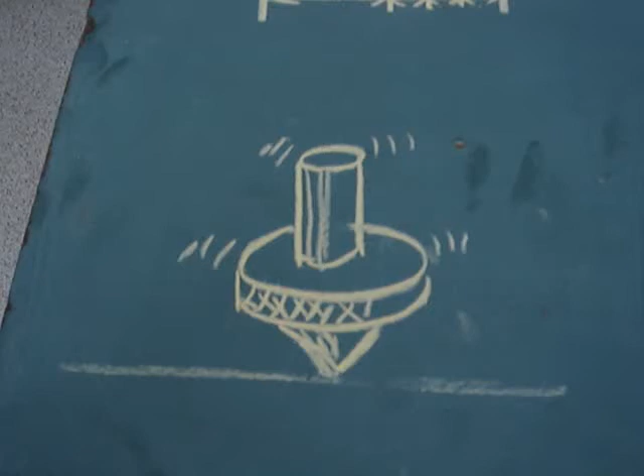Well, here we go again.

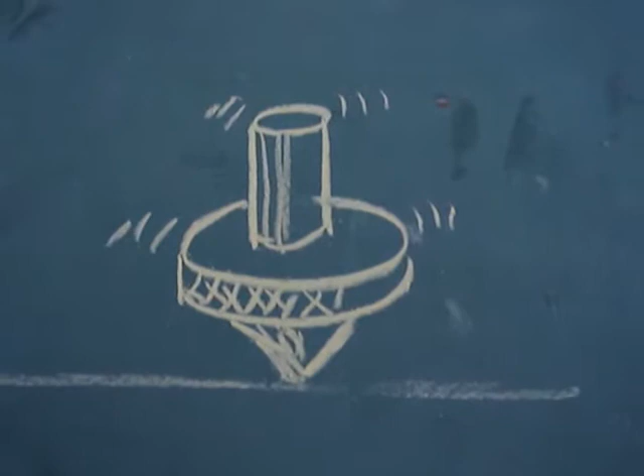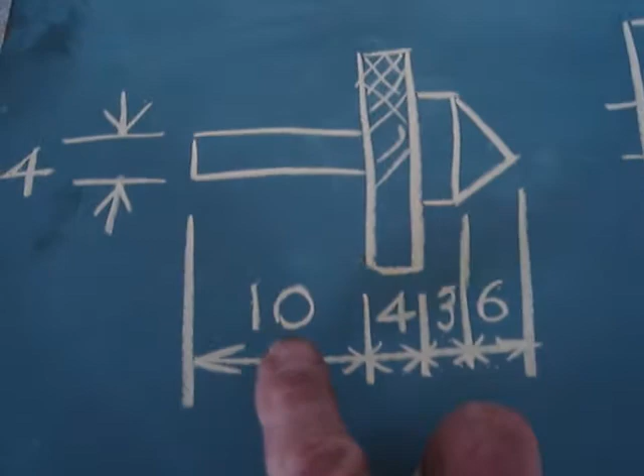Hey, the part we're going to focus on today is this thing here. It's a skills generating exercise, so by the time you finish you should be able to do a whole bunch of lathe skills. So we're just going to make this spinning top. It looks a bit like this. We have a schematic here which has some more specific details, and you see it's got some measurements across here. They are all in millimeters. So this becomes this. We have a number of steps to work through.

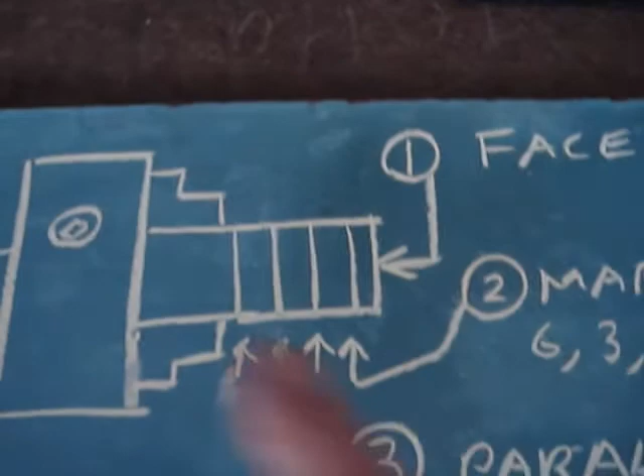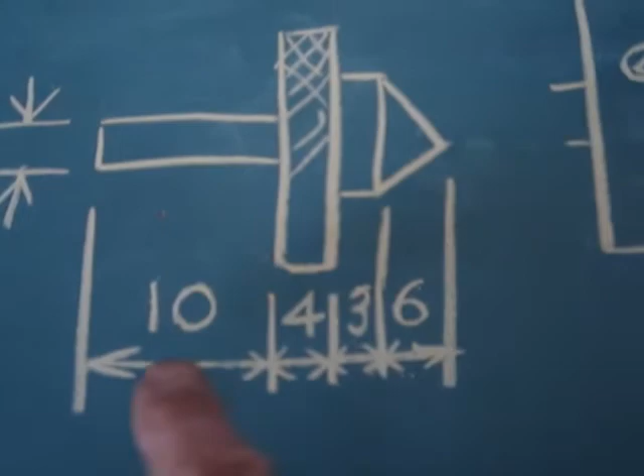The first thing we need to do is put a piece of work in the lathe, grip it in the chuck, looks a bit like that. We need to face the end off, and then we're going to mark it out with those measurements. And now the measurements come from there, 6, 3, 4 and 10. Same over here, 6, 3, 4 and 10, marked across here, and we're going to mark that by putting some ink on, and then we'll move on. So number 1, face, number 2, mark out.

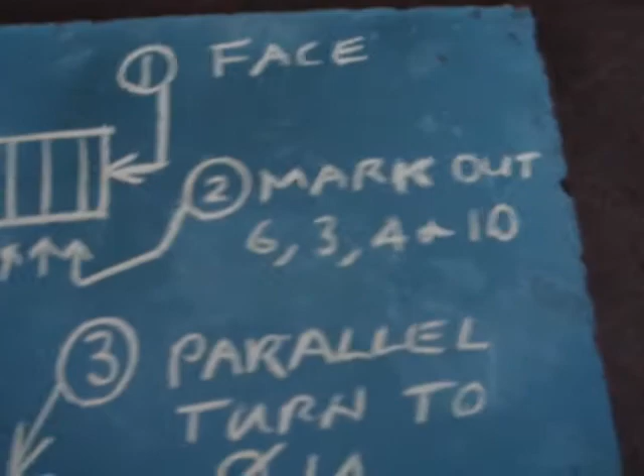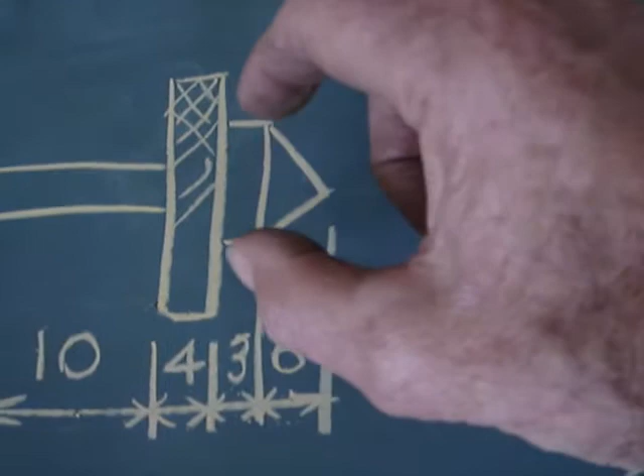Number 3, we're going to parallel turn, and we're going to parallel turn down to diameter 14, and that's actually that diameter there, which actually is not on the plan yet. And what do you know? Now it is there, the 14. So that's step number 3. Step number 4 is to mark out the 6mm line, because we actually got rid of it when we parallel turn. Parallel turn is to create that parallel surface.

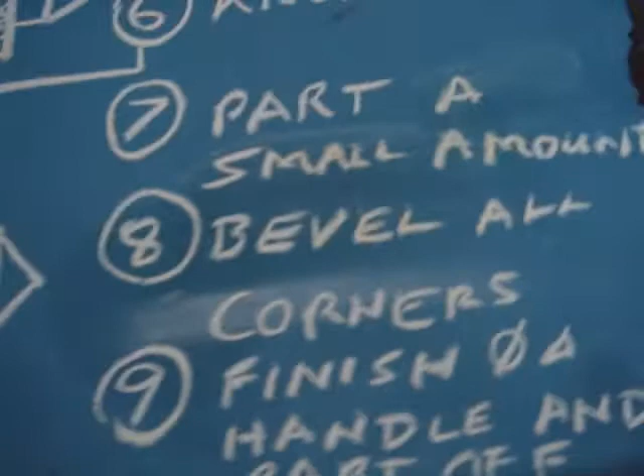Then we're going to taper turn, and we're going to knurl, and then we're going to part a small way through, and then we're going to bevel all the corners, which means taking all the sharp corners off. And then we're going to finish the handle part down to diameter 4, and then we're going to part it off, and then we have a finished product.

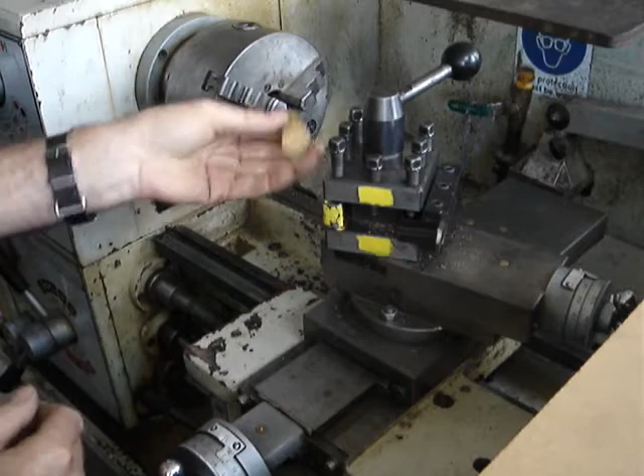Right, we're going to take our piece of brass, and as you can see, the piece of brass has got a sawn surface on here. It's been cut off. You may start with a piece which is longer than this, but we would not cut them to the length that we want straight away, because we're going to use a lathe to do that for us. So we're going to put it in the lathe. We want it protruding about 25, 26 millimeters. That should be enough, so we can do all of the work on that.

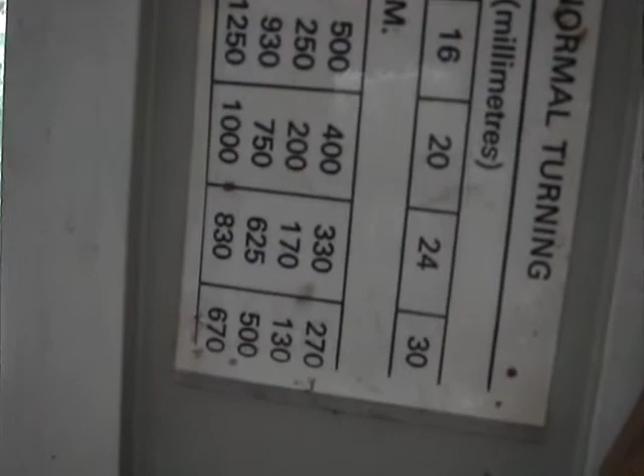First step is to put the lathe on the correct speed. We are working with diameter 25 brass, so it's 25 across from there to there. We have a chart on the wall over there. Or can we see it? Yes, we can. So at the top we've got a number of materials: mild steel, tool steel, brass. We're looking at the brass. So follow down here, it's diameter 25, so we're looking at that 24 line. That's close. This is 625 RPM, and so that's what we would do here.

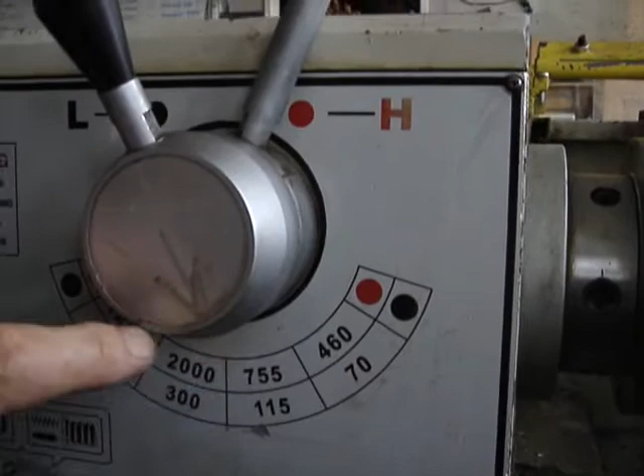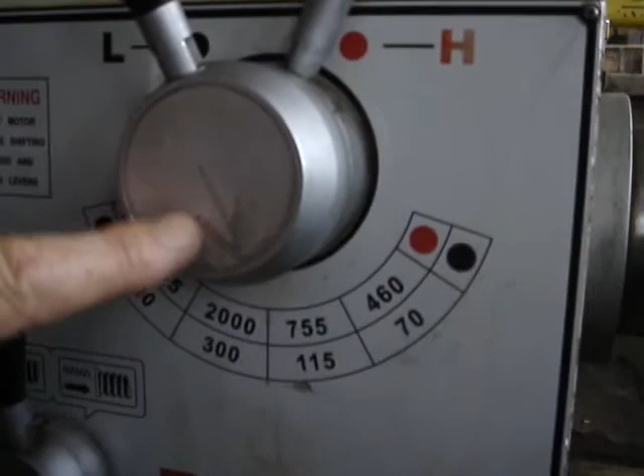We would set the speed on the nearest to that, and at the moment I've got it set on 755, so that should be fine. And it's in the red. So this handle here should be on the red, and this handle here has got a pointer on it. It's worn off a little bit, but that's the speed we want there. Okay, so the first step on our chart was facing, so we'll turn our lathe on.

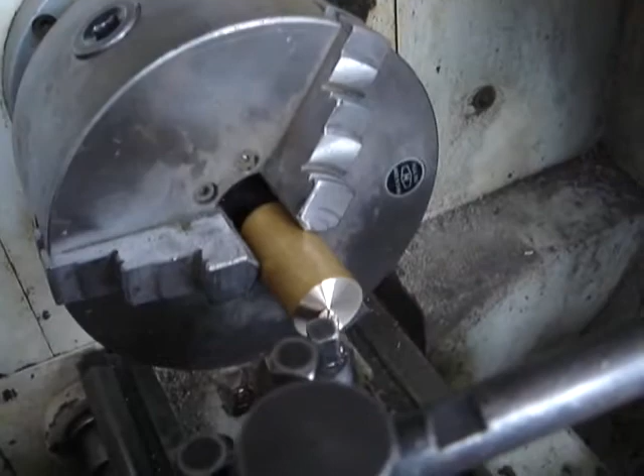We're going to move the cross slide, moving across nice and slowly until we get to the middle or the center. And when we get to the center, it should be finished, and we'll end up with a virtually polished surface, because the tool has just been sharpened, so we should end up with a really nice finish. Well, this is called facing because we're creating a smooth face. There we go, we are finished. And as you can see, we have a smooth, shiny surface, which is ready for the next stage.

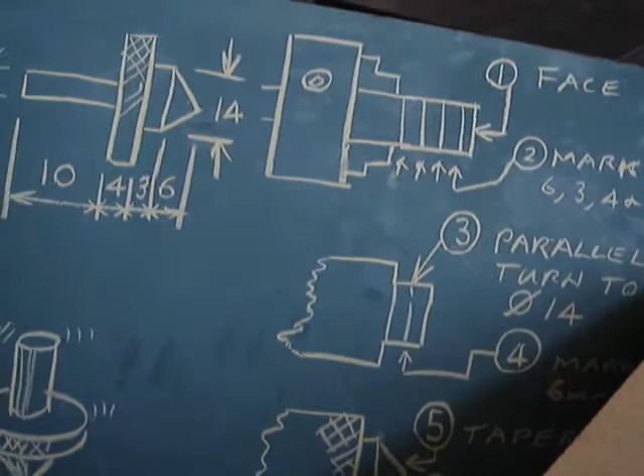Now we're going to take our odd leg calipers, and we're going to look at our measurements again. Let's get our measurements sorted out. Okay, so over the side you can see we're going to put our measurement of 6, and then 3, and then 4, and then 10. We'll put all those measurements onto our piece of work.

To make it easier to see, we'll put some ink on, and so we'll just put some ink on like that. It doesn't have to go all the way around, and it means that when we put a small scratch, it's going to be very easy to see.

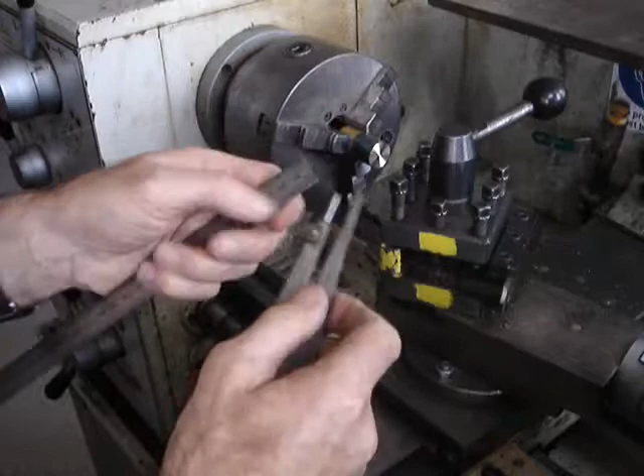Now we're going to take our odd leg calipers, and our first measurement is 6. So we're going to put the hooked end of the odd leg calipers over the end, and we're going to set the scribing point on 6 millimeters, which is there. We're going to turn our lathe on, and we'll put that scratch on.

Now the next measurement is going to be 3, so we'll add that to the first one, so that makes 9. Because we do all our measurements from the very end. And then another 4. My mathematics doesn't let me down, that makes it 13.

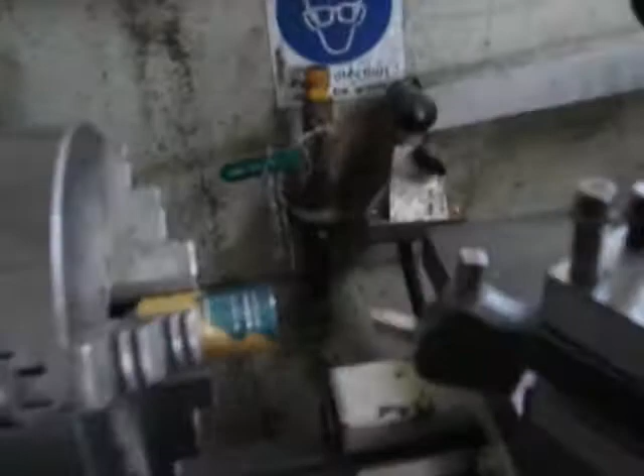And finally another 10 for the handles. 13 and 10 gives us 23. 23. Okay, there we go. So we've got all our marks on there. You can see that on there. See them quite clearly. So we had a 6, a 3, a 4 and a 10 all the way across here.

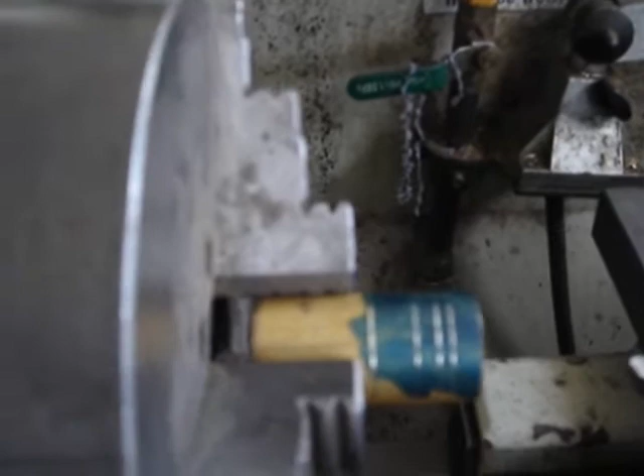So we're now going to parallel turn the first 9 millimeters. So we're going to parallel turn those first 2 areas down to diameter 14. Now when we're parallel turning, we're going to be moving this hand wheel here very slowly so that it moves the tool across. And it's going to move across the outside surface, and we're going to go from there to the 6, and then we're going to keep going another 3, and so that'll make a total of 9 millimeters.

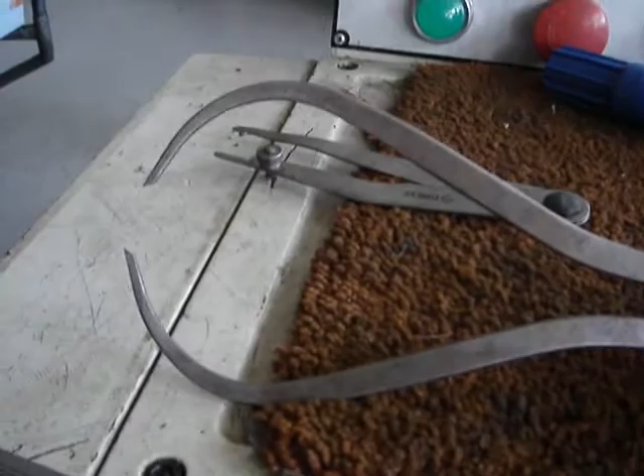We need a couple more tools. We've got these tools here. This is a pair of outside calipers. We've got a steel rule in millimeters. You notice the graduations are not always... so the first number there, 10, represents 10 millimeters and so on. Okay, so let's set that.

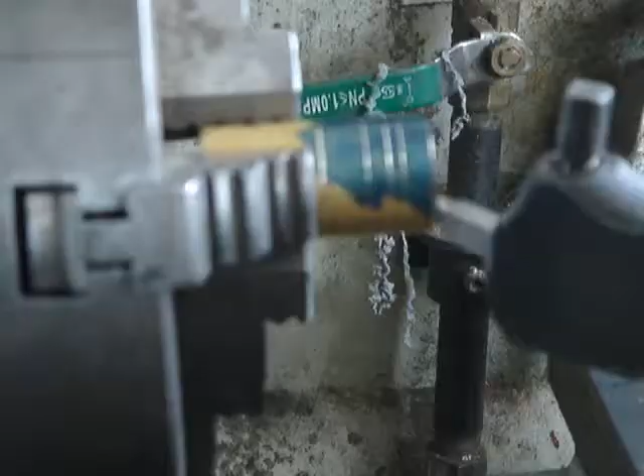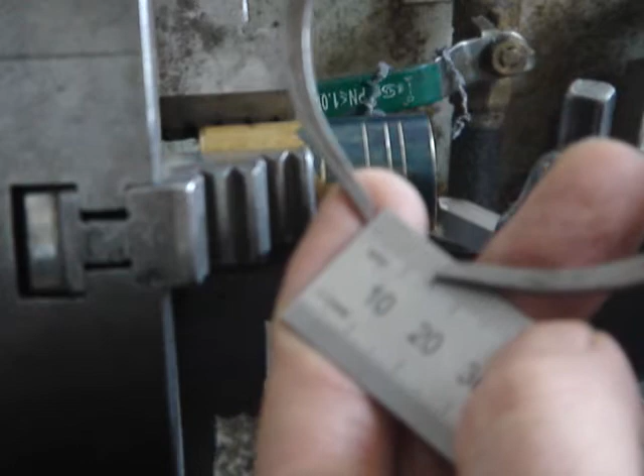Now we need to set the outside calipers on the steel rule. You notice that this end of the steel rule reads 0, and so the end of the outside calipers needs to be right on the end of the steel rule. And then we can read off the measurement there, and we have it set on 14 millimeters. And so what we're going to do now, while it's running, we can actually check just by putting it over top of the work this way as we go. Alright, so let's get started.

Okay, so that's gone to 9 millimeters. We'll check it. No, miles to go yet. Take the tool in. It's going to do a little bit. We might be closer. No, more to go. Because we're getting a little bit closer, I'm just going to do a small amount on the end.

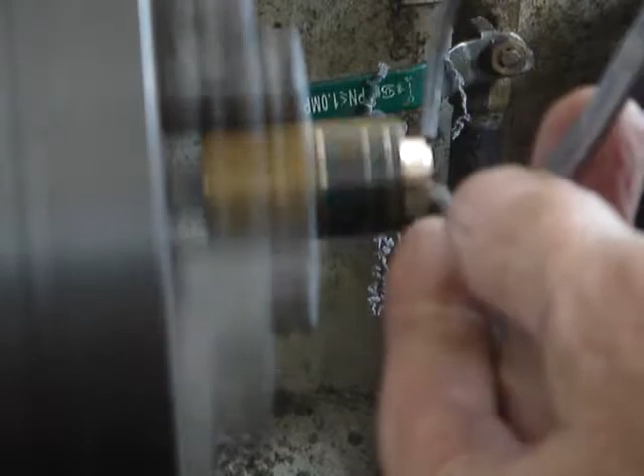I've actually gone a little bit too far. But as you can see from the plans, we're going to actually put a point on here, so that's not a problem. Is it right? Okay, so I'm now going to bring the tool back a little bit and carry on cutting.

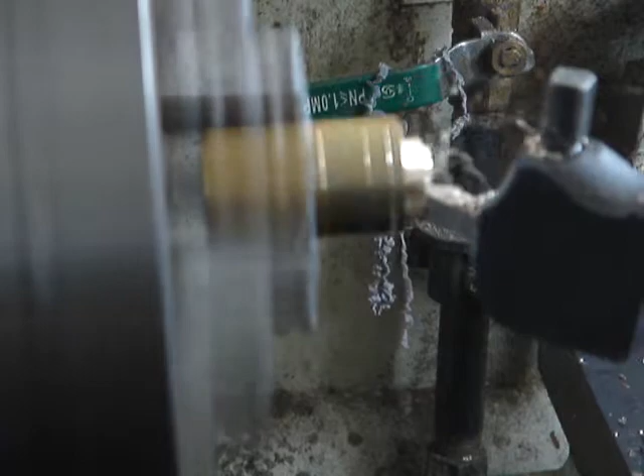I'm going to check that, and as you can see, it just falls over with its own weight. So we're not forcing it, because we could force it, and it just forces these open a little bit. So we're just going to use the weight of the calipers, and that's pretty good where it is. Happy with that. Finish that off. Once again, go nice and slowly, otherwise we're going to end up with ridges.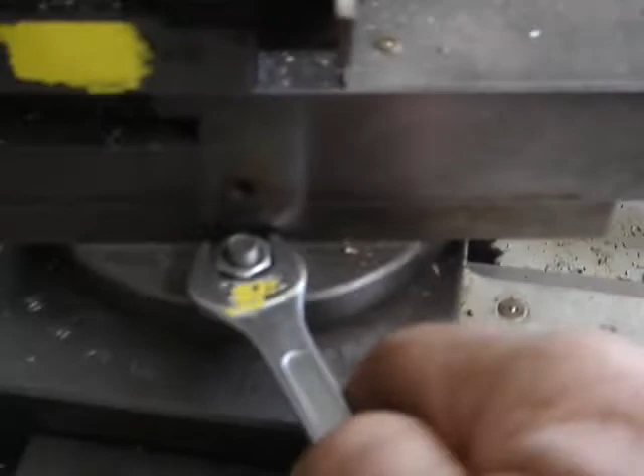We want to loosen the bolt here and this one around the other side. And we just loosen them like half a turn. And we're going to use a spanner off the rack. A spanner here. And we're going to use the open end because the ring end won't fit. And we'll just loosen it a little bit. This one around the other side, same. And then we can move this around.

Let's get the other one a little bit looser. There we go. And there is a line. There's a very fine line there, and you probably can't see it on the camera. And there are some degrees around here. And we're going to set that on 45 and then lock it.

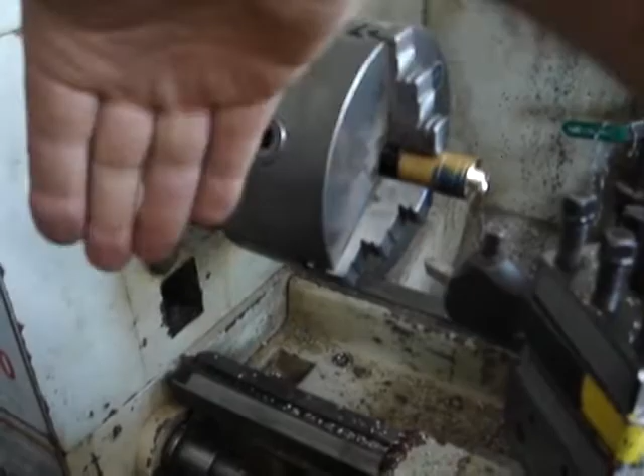Now this time, when we move the tool point here, it's going to move on an angle to the center of the lathe, and it's going to create the point. And we're going to use the compound slide, this one here. So we're not going to use the cross slide, and we're not going to use the hand wheel, although we may need to position the tool to start with, but we're going to mainly use the compound slide.

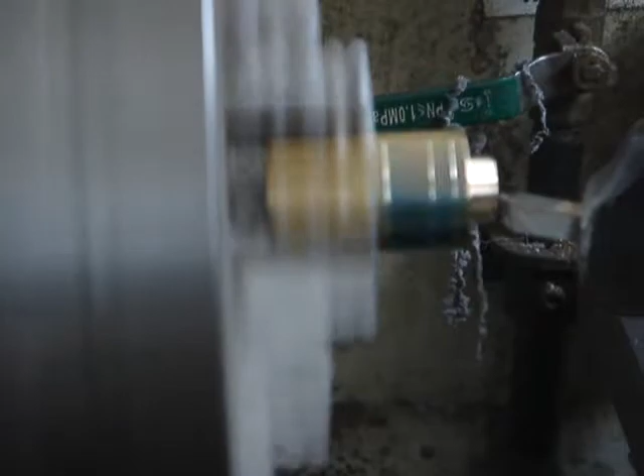And you can see the compound slide, you can see the angle of it. It's going to move across, it's going to move the tool in that direction, and that's going to give us that angled point. Right, so on the lathe goes, and we're going to start machining off just a small amount at a time. You can start to see an angle that's being...

Now we're just doing our last cut. So it's taken about 5 or 6 cuts. And by cut, I mean that's every time you move the tool across the work. It's called a cut. And you see we've got a nice point. I'm moving nice and slowly and progressively, getting a good quality finish. I'm just going to stop there. I'm going to move the tool away from the work just so we don't scratch it.

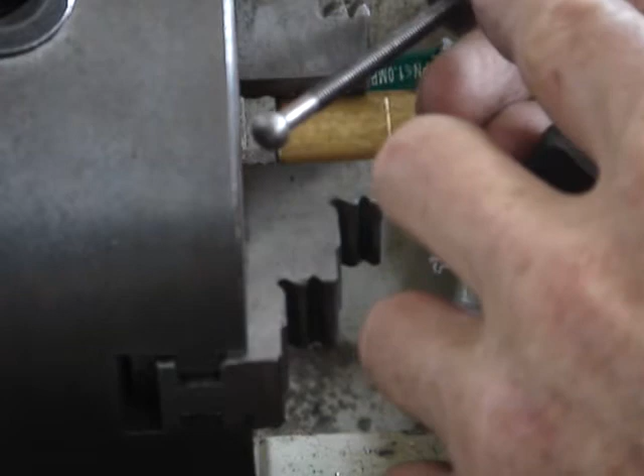And so the next thing is we're going to put some knurling around there on the outside, and that creates a pattern. The idea of the pattern really is to create a grip on something, and you can see on this little nut on here that adjusts the thread on the outside calipers that this nut has actually been knurled. It's got a straight knurl on it, there's little grooves in it. The knurl we're going to put on is like a diamond pattern.

Alright, so this is the knurling tool, and you can see it's got these rollers, and each of these rollers has a diagonal impression which goes in opposite directions. So when you knurl, you end up with a diamond pattern as they cross over. We're going to put this tool in here. You just need to make sure there's no filings underneath where the tool is clamped, so the tool is clamped securely. We're going to put that in there, tighten that up.

We've got this tool here we use to tighten those. They don't need to be mighty tight, just firm. Just firm. Because we've cleaned all the filings out from underneath, it's got a good contact and it's going to be clamped nice and tight.

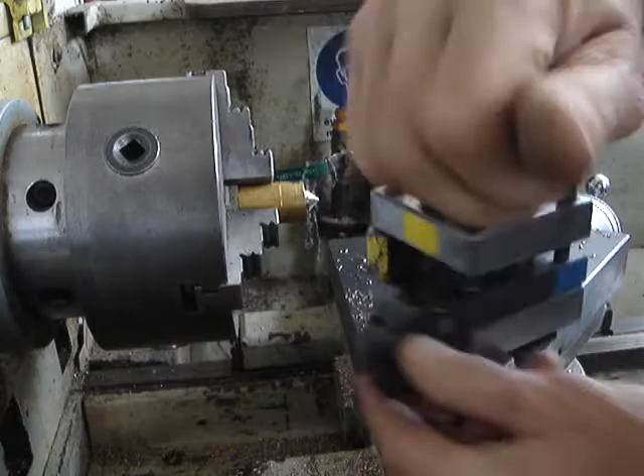Now we need to rotate that around. Actually, before we do that, we'll just put a little bit of lube on that. So I'm going to use some WD-40. Now this stuff here, WD-40, is just a thin oil. And this means that those rollers are well lubricated so we don't damage the tool, because it has to work quite hard. I'm going to rotate that around so that the tool now is at right angles to our piece of work. So I'm going to lock that up.

So what we're going to do now is we're going to push this knurling tool. At the moment it's just touching and no more. And we're going to push it in with the cross slide, so that's going in that direction, pushing in that direction. But we do need to slow the lathe down.

The lathe speed, the optimal speed was 625, so half of that. So we're looking around about 300 on our thing here, and there we go. We have actually got a 300 speed, so it's quite nice. And let's pop it in the black. All right. So it's a little bit slower.

Just going to check the angle, make sure it's pushing on the right angle. Okay. Just need to move it a little bit to get the angle right. In fact, I'm going to go slower than that. Quite like it really slow, so you can see the mark being made. And on she goes, making an impression.

That off. And as we can see, I don't know if you can see from here, look, can I get a bit of focus? No, it's not going to cooperate. However, there is some knurling done on there.

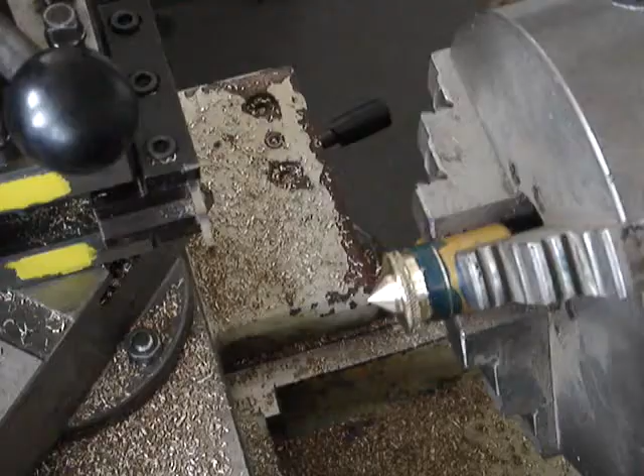Right, now because of the knurling, I've actually started to make a mark in there with the parting tool, but before I did that I had to put the 4mm mark back on because the 4mm mark had been taken away when I put the knurling on. So once again, set the odd leg calipers on 4, I scribed it on.

Then I swapped out this knurling tool for the parting tool, this one here, because the parting tool is the one that we use to cut work off, and we're going to use it to make a groove. So we don't want to cut it off yet, but we will eventually go down to diameter 4mm with this tool. But I only want to go in maybe 5 or 6mm.

And then I'm going to use this control here to swivel the tool post, and then I'm going to bring the usual turning tool, the common turning tool. You notice the end of the turning tool has got a point on it like that, so we want it nice and even, so we can take it that way and that way to put a bevel on, to remove the sharp corner. So let's lock that in place.

Now because things are quite close in here, you just need to be really careful and keep your hands clear. Alright, so we're going to bevel one side, like that, that's all we need to do. It's a very small bevel. I'm a bit cautious now because I'm getting closer to the chuck with the tools. And then we'll bevel the other side. Turn the lathe off so I can think about what's going on now.

So we're going back to the parting tool, this one here, and we're going to go into diameter 4 as it says on the plans, and that part is going to become the handle. Now I'm going to speed the lathe up a little bit. For parting, we can go half the turning speed, so that's around 300. So I'm going to put it on 300. And there.

I'm just going to go little by little. Take it all the way down to 4mm. And how do I know it's going to be 4mm deep? Well, I guess you've guessed it, we're going to use our outside calipers set on 4mm so that we can check down inside here when it is down to that size.

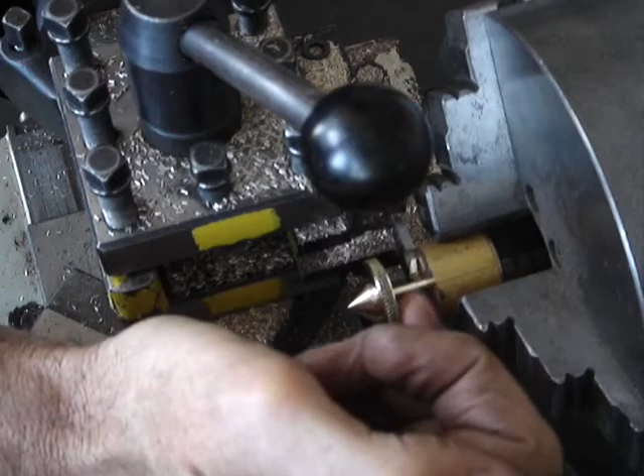Now we're almost here. I'm going to now check this while it's running. There we go, slides over, happy with that. Now we're just about to part it off completely, and as you can see we have the 4mm handle or spindle part in here, the part we spin with our fingers, the spinning top.

So I'm just going to part that off completely, nice and slowly, feeding the tool across nice and slowly. Feed is when we're moving the tool across the work, and that's going to drop off. I wouldn't try and catch it, just let it fall by itself. There we go. There we go, and that's the part that we just made.

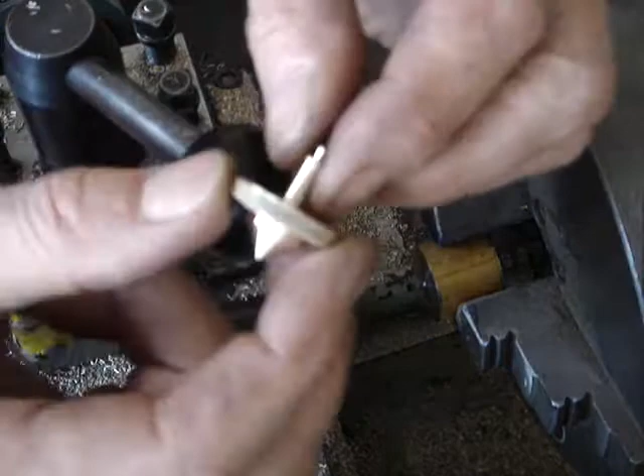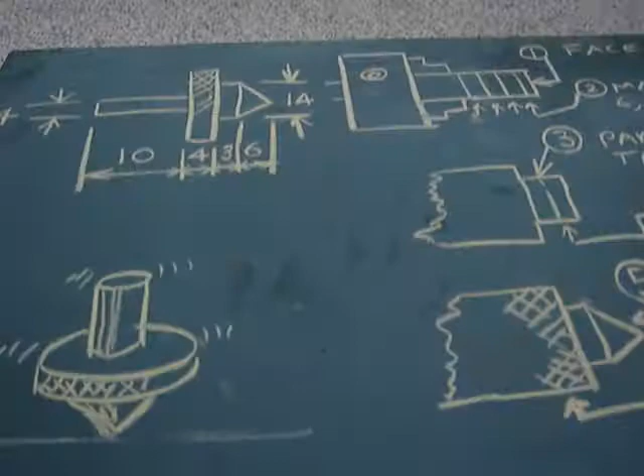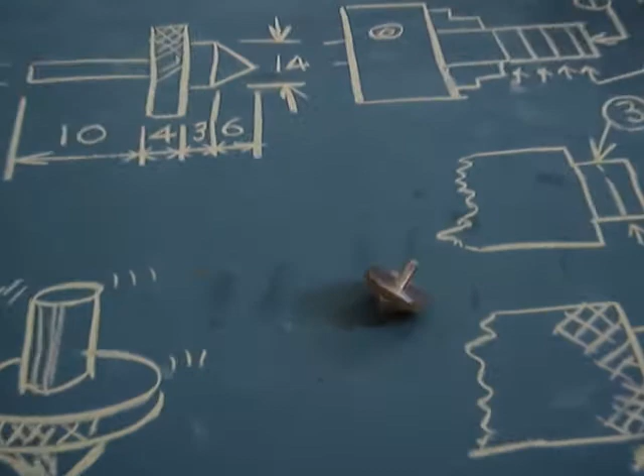There's a little bit of work we need to do around here just to take some of the sharp edges off. Unfortunately we can't do it in the lathe because we can't hold it anymore. We don't want to hold it by the knurling because that would spoil it. Alright, so I guess the only thing now is to check it out to see whether it actually works or not. So that's our little spinning top, and we have a bunch of skills in there. We have facing the end off, we have taper turning, we have knurling, and we have parting.

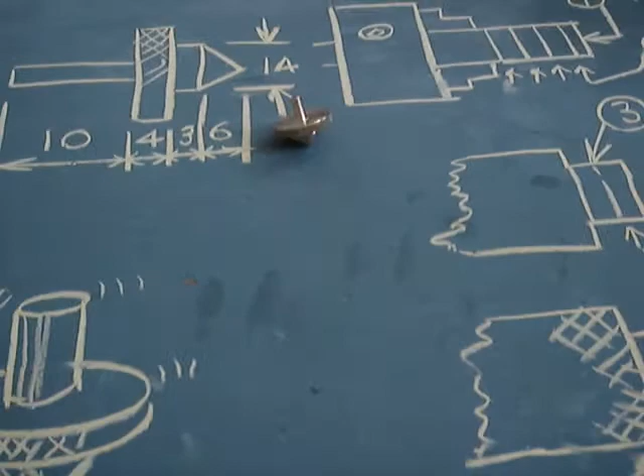Let's see if it works. Where is it? Yeah, it seems to be working quite good. A little bit wobbly. Don't know what I'm doing very well.